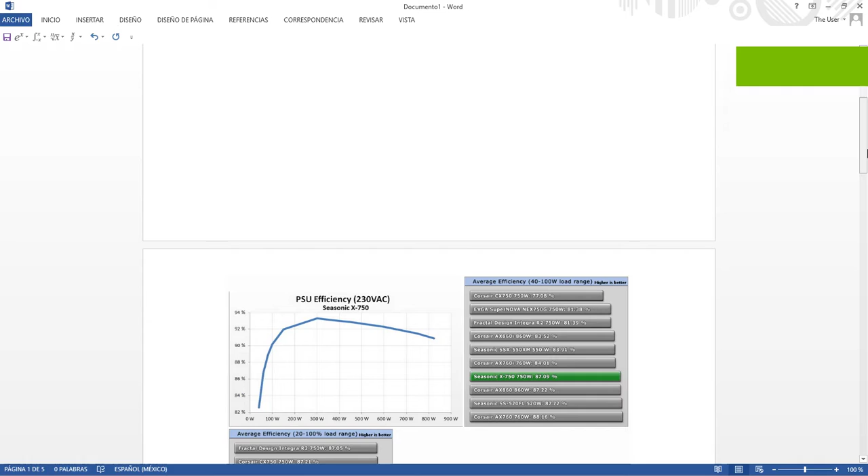Hey guys, today we're going to talk about how to choose the most efficient power supply for your build.

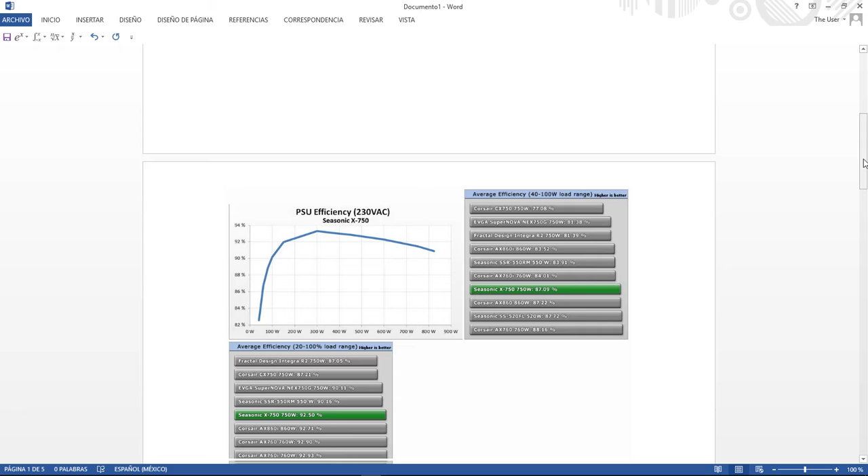Before we start, I need to tell you this is for people that want to get very picky with their power consumption and find the absolute best efficiency point. For most of you, maybe it's not worth your time, so just look at reviews and see, okay, this PSU is efficient under most conditions, so I want to buy that. But here I'll explain everything, or most of what you need to know about PSU efficiency.

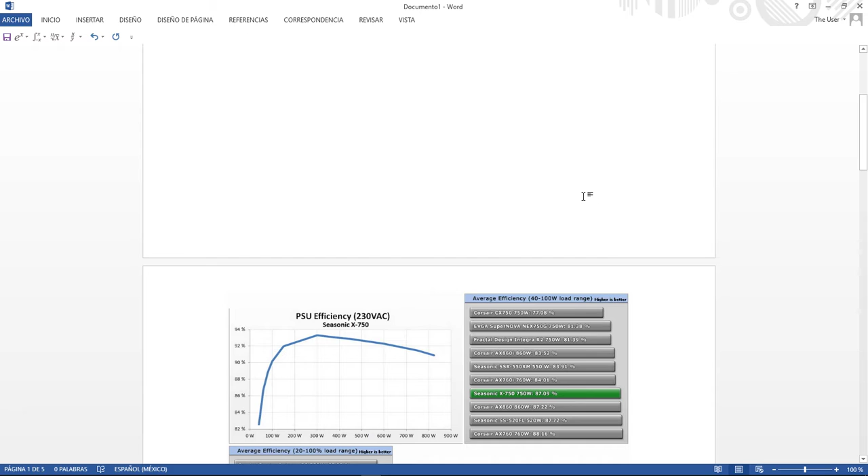Number one, we're not going to use the 80 Plus certifications because they tend to be very inaccurate. I'll make a video about that, stay tuned. But as you can see here, the Seasonic X750 is an 80 Plus Gold rated power supply, yet under some conditions it may be more efficient than something like a Corsair AX760, which is an 80 Plus Platinum power supply.

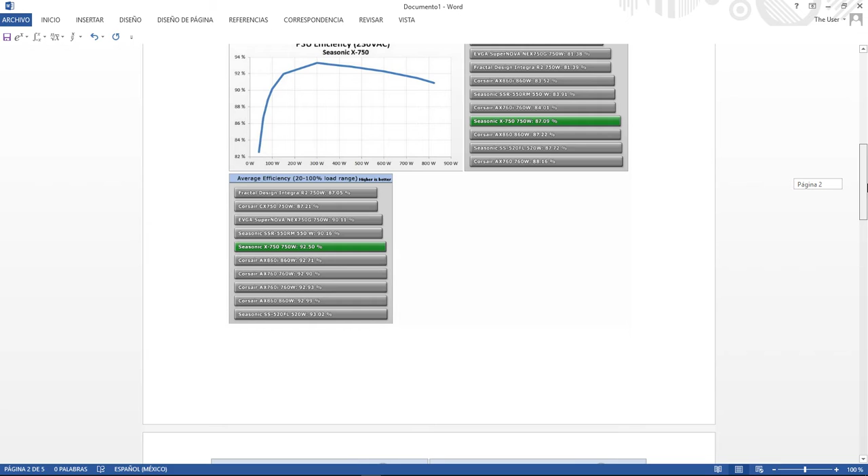So if you want to know which PSU is more efficient under a given load, you need to look at websites like Tom's Hardware or TechPowerUp, because these guys test those PSUs under a lot of conditions, like from 20 to 100% load, from 40 to 100 watts, and they also test vampire power, 5-volt standby power consumption, etc. So you get a better idea of what you should buy if you're aiming at higher efficiency.

Another misconception you hear very commonly about PSUs is that they're more efficient at 50% load. So if you have a system that draws, say, 300 watts, you should purchase a 600 watt PSU because that's how you hit peak efficiency. I'm going to tell you why that's wrong.

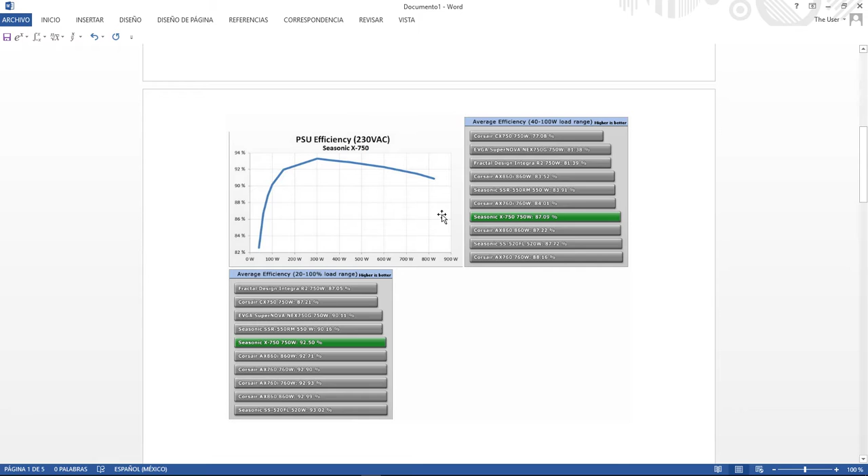So we look at the graph right here. I think we can make it a bit bigger. Okay, that's fine. So this PSU, same Seasonic X750, we can clearly see that it hits peak efficiency at 300 watts. If we do the math, we'll see that equals maybe 40% load.

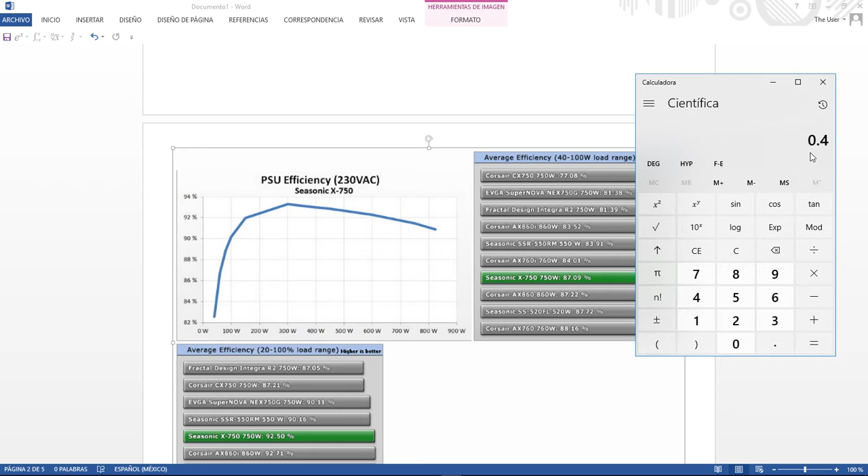So yeah, most efficient at 40% load, because 100% load means 100% of the nominal power rating. So if a PSU is 750 watts, 100% load means the PSU pulling 750 watts on the output, or in other words, a PSU providing 750 watts to your components. So this one hits peak efficiency at 40% load.

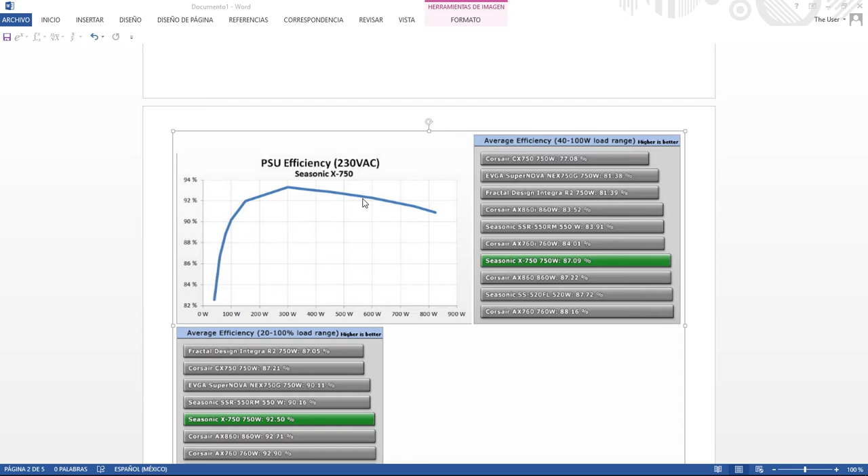Some PSUs might hit peak efficiency at 20% load. Some of them might do it at 60% load. So don't trust that rule of thumb. With that out of the way,

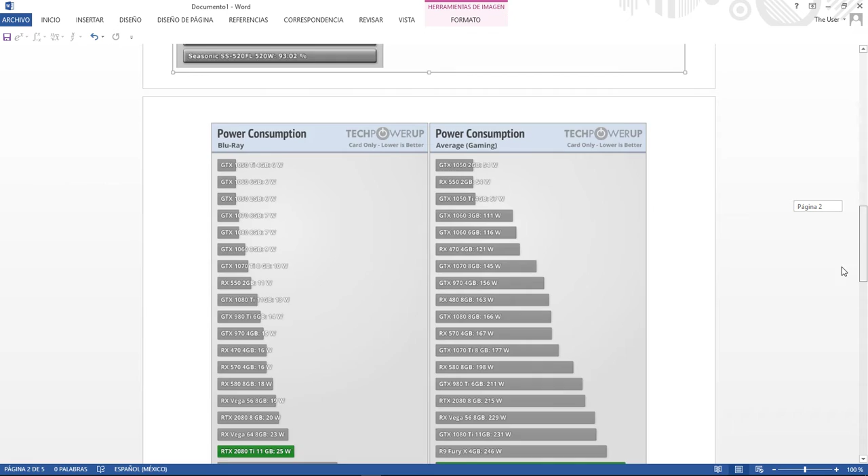we can move on to how we actually choose the most efficient PSU for your build. So what you need to figure out is what applications, or what you do most of the time, like what's your typical load and your typical idle scenario.

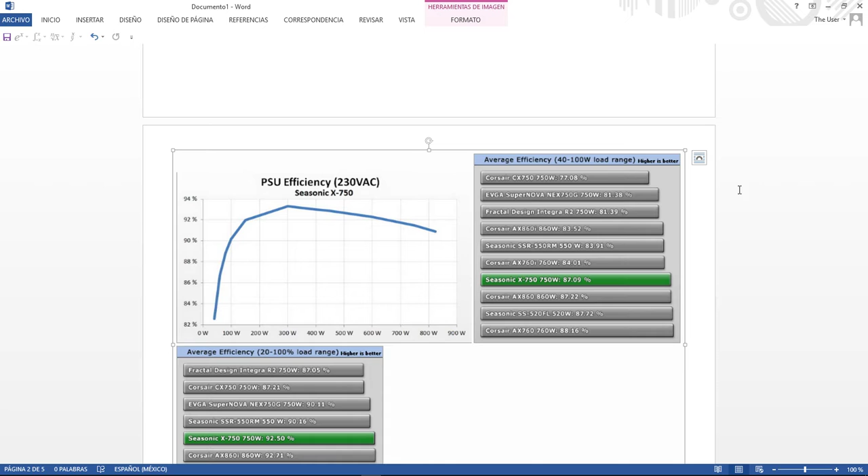Then you need to calculate the average power consumption both under load and at idle, and then based on the averages, how many hours your PC spends at idle, how many hours your PC spends under load, you'll know whether or not you want to be more efficient at idle or under load.

So not only does this take time, that's why I don't recommend doing this if you don't care about efficiency. This is mostly for people that are running their computer 24/7 and pay a lot for the electricity bill. In that case, they should be concerned about it, but otherwise, again, this might not be worth it.

Okay, back to business. So for that, you need something like a wall meter, like a Kill A Watt. But you could also use things like a multimeter, current clamp, etc.

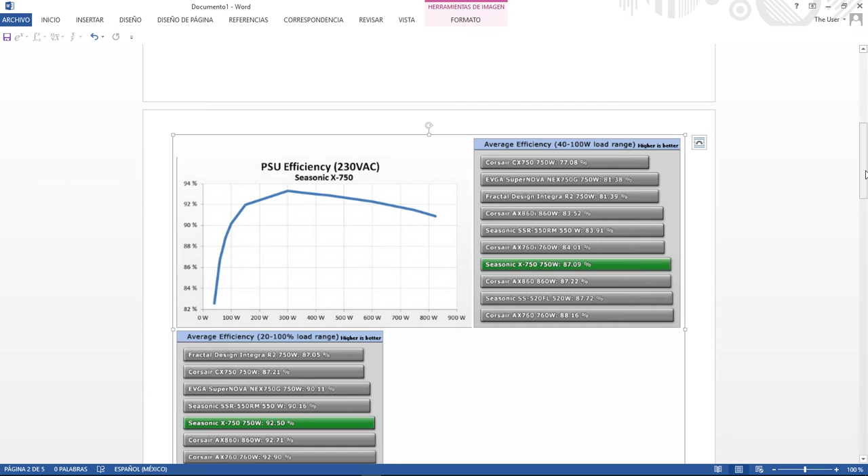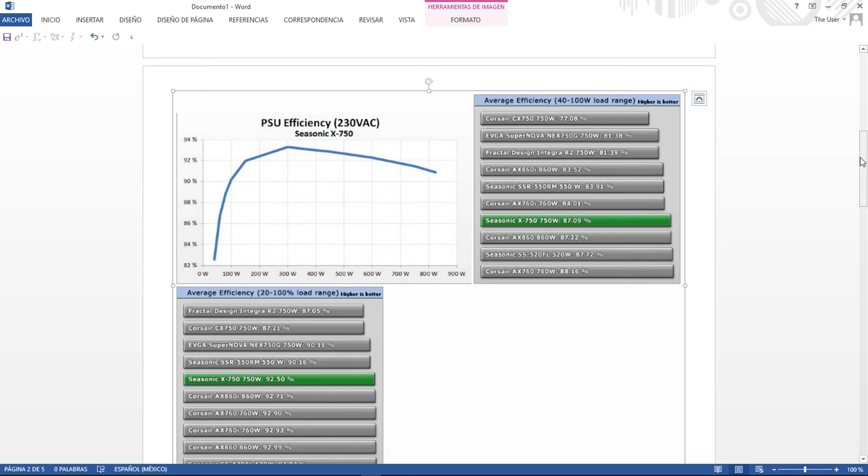But you also need to know how to use them, and you might not have those things available. Whatever the case may be, remember if you use a wall meter, that thing also takes into account the efficiency losses of the PSU, so it's not that accurate anyway.

It's very common, pretty straightforward to use. Many people like them. The thing is, you fire up a game or execute a demanding load, and you find out that your average power consumption is like 400 watts. In that case, remember you need to subtract the efficiency losses by the PSU.

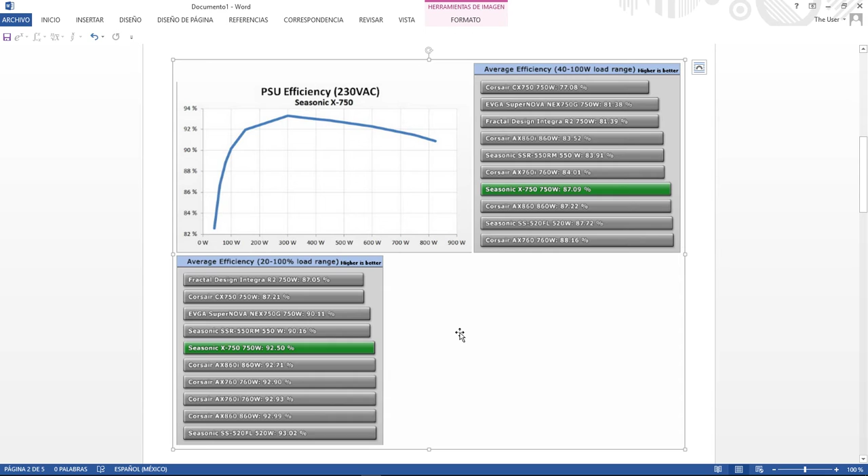We're gonna take this as an example again. It's pretty simple. 750 watts. So your power consumption is 400 watts. You assume that without those efficiency losses, you're looking at something in the 50% range of the PSU. So this PSU will be about 93% efficient.

So 400 watts times 93%—oh, did it wrong—400 times 0.93, and that's 372. You're gonna do pretty much the same with your idle load. 372 watts. So you need to look for a PSU that is most efficient under 372 watts.

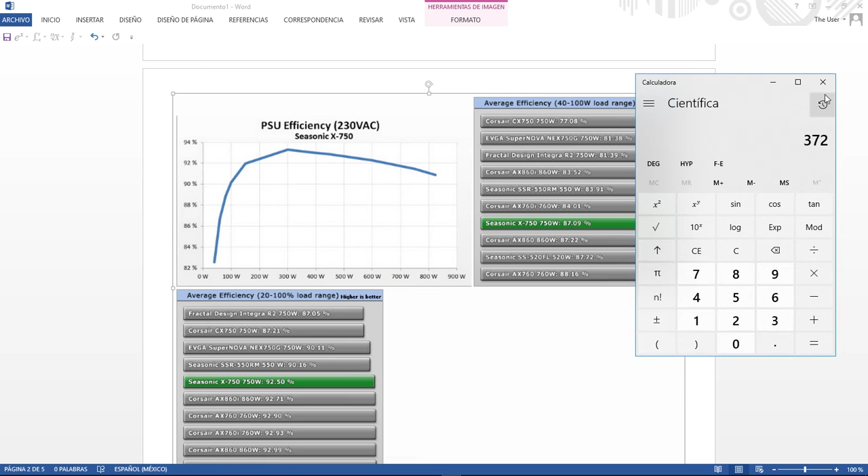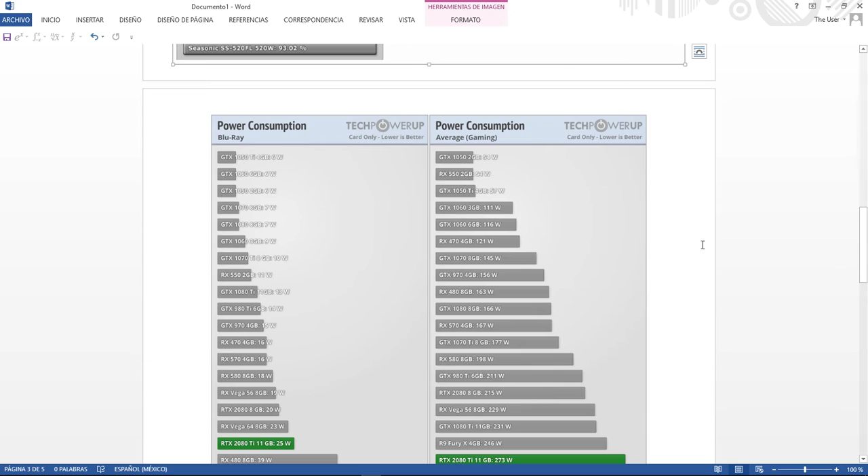Now, if you don't have a wall meter and you don't have something like a multimeter current clamp, hopefully you'll find websites like Tom's Hardware, TechPowerUp. They also test power consumption of the components. There are other websites also, and if they use a similar configuration to you, it might make sense to go with them as well. But the nice thing about Tom's Hardware and TechPowerUp is number one, they don't use the power...

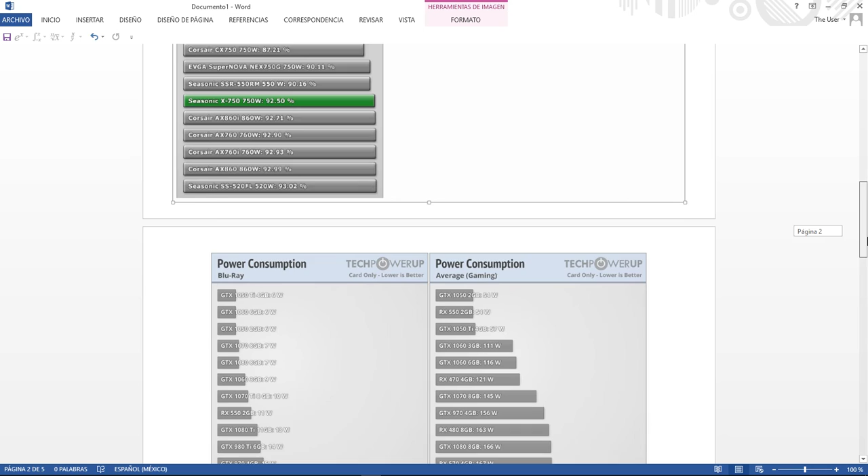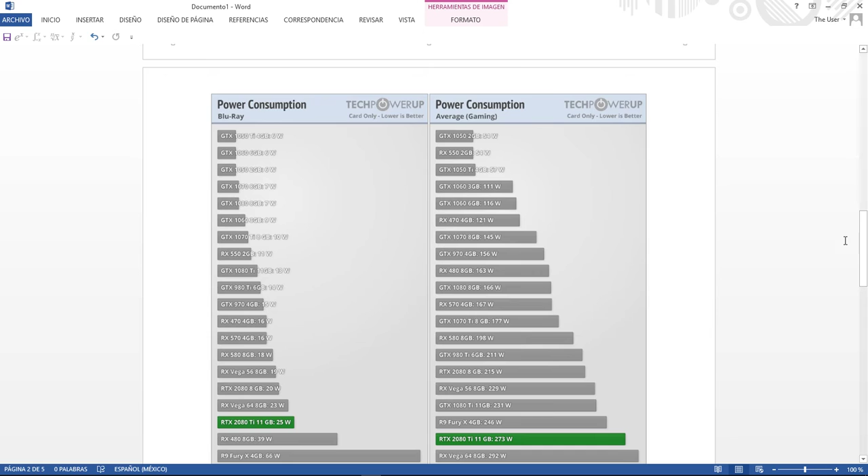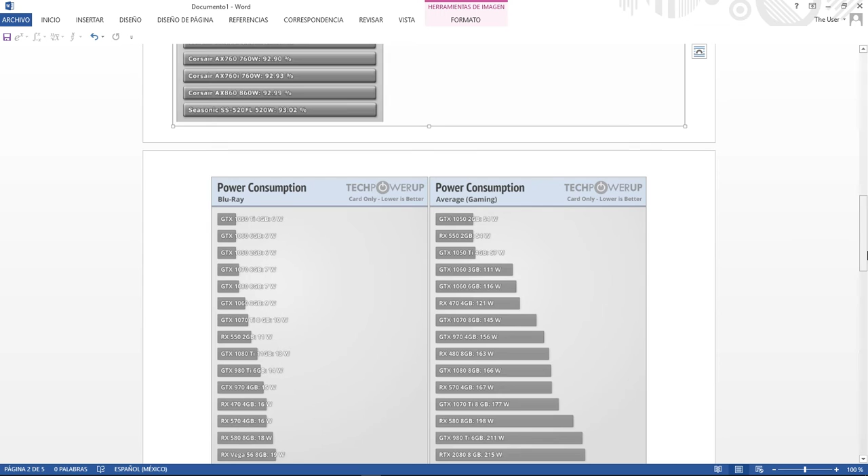A wall meter, so you don't run into these weird calculations that might be inaccurate anyways. And also, they test the GPU only or the CPU only, and they use better equipment to do so.

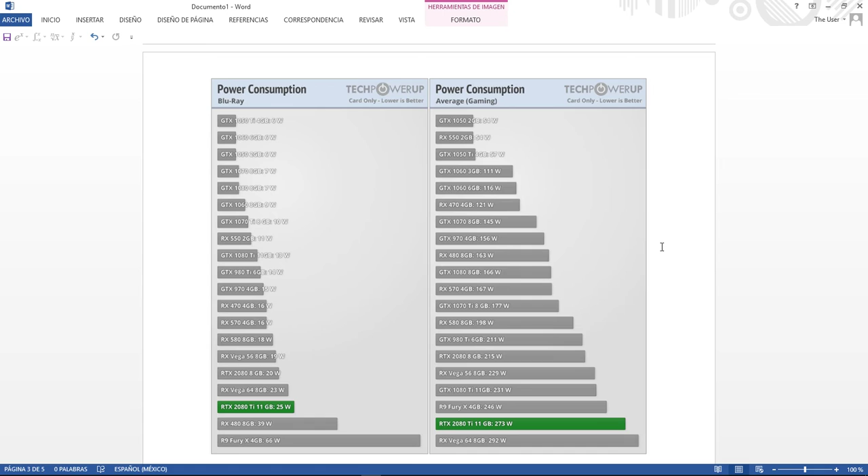So it's very nice. Now, when you get into a review of a certain graphics card, try to match the one you're using. Remember, depending on the model, like if it's a Gigabyte Aorus or a Gaming G1, there might be a difference. But also, make sure you're looking at the right power graph.

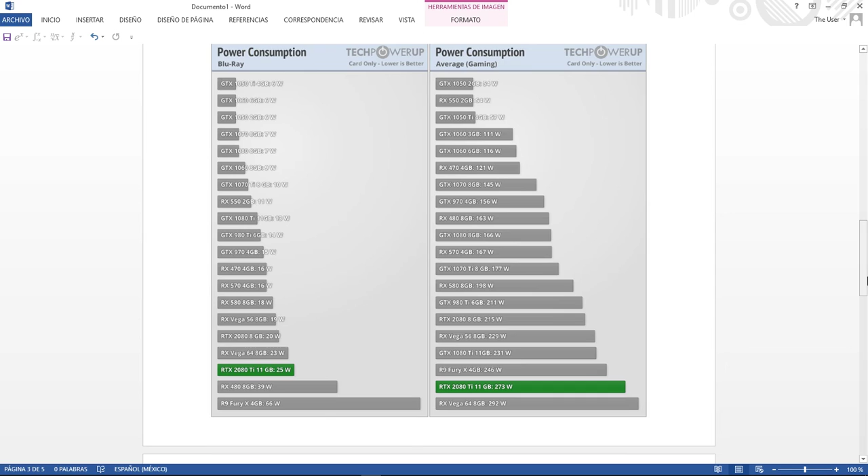So in TechPowerUp, we'll find like stress test, gaming, idle, multi-monitor, Blu-ray, etc. So for load scenarios, we want the average or the sustained graph, in which they measure what's the average sustained, not peak, sustained. So what's the power consumption under gaming or under a demanding task most of the time.

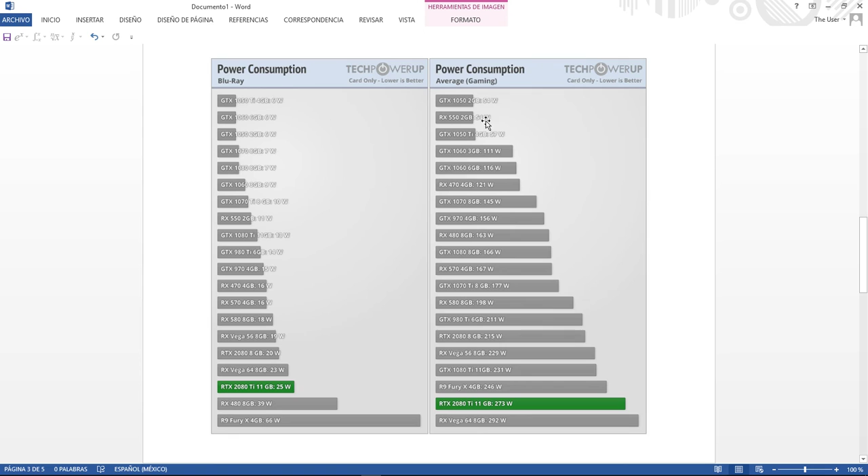So for example, if we have a 2080 Ti, we see that its power consumption sustained is about 273. Now, if we look at the CPU, this is gaming. Remember, depending on what you're doing, these numbers might vary a lot. In case of gaming, this isn't taking the CPU to its limits. You're not really utilizing all those 8 cores and 16 threads. So in this case, the power consumption is rather low, about 70 to 73 watts.

Now, what happens if you're running Blender? This thing could draw like 200 watts. So make sure you're looking at something that's the most compatible possible.

Now, we add up the numbers, so about 70 watts with 270, that's 340. GPU and CPU are the components that draw the most power, but you also need to take into account motherboard, etc. But that's not a whole lot. I would add like 50 watts because you're not really stressing those components most of the time, even if you're doing something demanding.

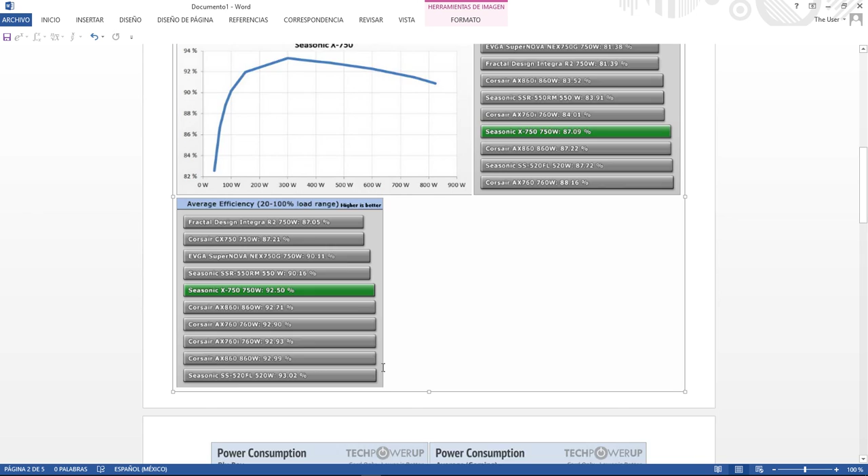So we end up with about 370, maybe 390. And so in this case, we find out that our system draws like 390. So we need the PSU to be most efficient under 390.